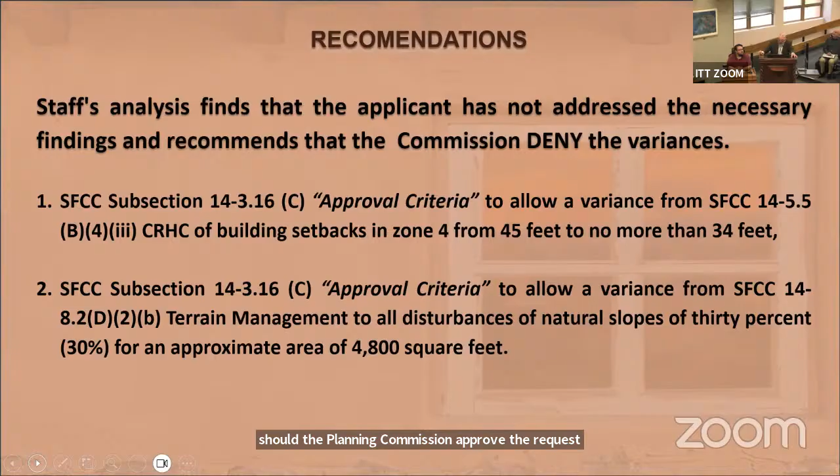Should the planning commission deny the variances, condition number 5 of the staff report directs the applicant to revise the application to comply with the code and resubmit the revision for staff's review. Should the planning commission approve the requested variance, the planning commission will need to address the variance approval criteria to support its decision. This would go for both variances that we have analyzed.

Staff's analysis finds that the applicant has addressed the necessary findings, recommending approval of the development plan subject to conditions identified in this report and within attachments A and B. Again, this is subject to a revised application, meeting the staff conditions without the variances.

There are 40 conditions listed in table 1, conditions of approval, page 3 through 6 of the staff report, and attachments A and B of the attachments. I believe that the applicant has been working diligently to reduce that number, which I believe he'll talk about. He's up here.

There are 56 technical corrections of approval listed on attachment A. Again, some of these technical corrections can only be done during the construction phase, such as fire protection and construction of the roads. Some are part of that construction portion, so they have to be on there. Some are just minor inconsistencies that have to be corrected on the sheets or within the report. Again, the applicant has been working diligently to resolve those issues, and he can talk about them when he's up here.

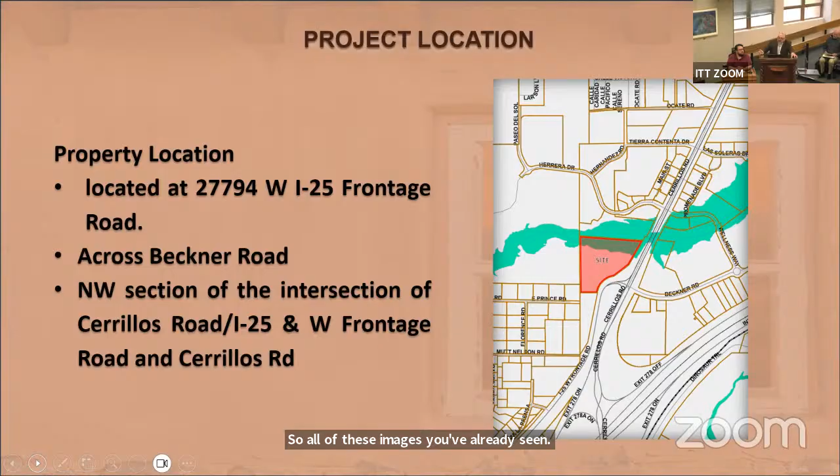The project location is plus or minus 19.21 acres. I'd like you to notice the I-25 frontage road design. The original design kind of swoops around the entrance there. This road configuration is changing with this proposed application.

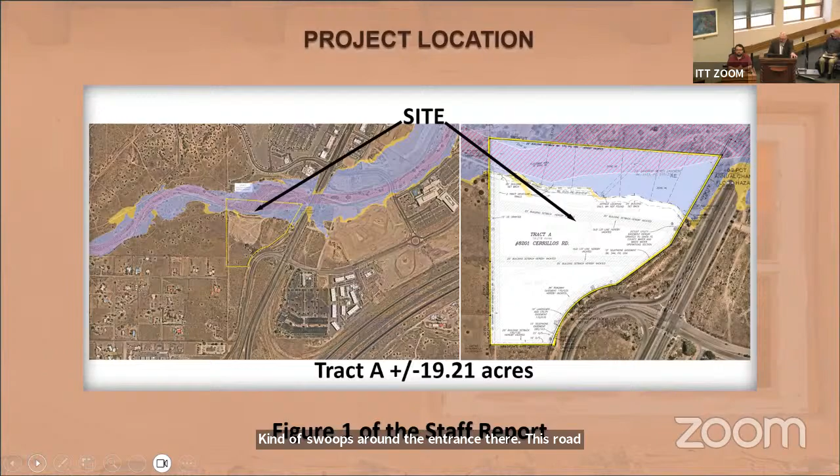The property is zoned C2. Adjacent uses consist of the school, which is the New Mexico School for the Deaf, to the west. Northwest is De La Luna subdivision, which is all residential. Southwest is the Arroyo de los Chamisos, to the north and state right of way to the east. The property just below it is zoned C2 and is vacant.

The applicant is requesting an 11-foot, not 6-foot as was in the report, reduction resulting in a 34-foot overall setback from the Cerrillos Road Highway corridor. The required setback in zone 4 from Cerrillos Road is 45 feet. Again, it's staff's position that if you've got a blank slate, you are the master of the design — you can design around these without the necessity for a variance.

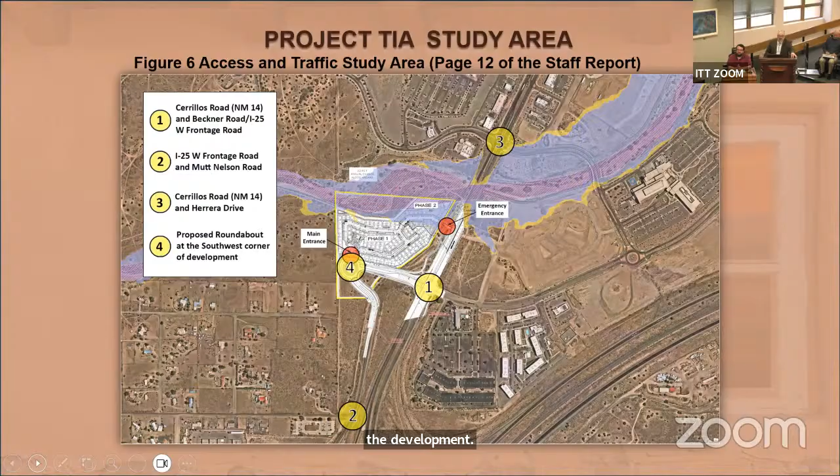I think I'll move on to the next one, and then we'll come back to that slide.

In summary, staff's analysis finds that the applicant has not addressed the necessary findings and recommends that the commission deny the variances, which are 2023-7662, the Bungalows Cerrillos Road setback variance, and 2023-7663, the Bungalows on Cerrillos slope variance. Staff's analysis finds that the applicant has addressed the necessary findings and recommendations for approval of the development plan, subject to the conditions of approval.

That means the architecture—if you understand what those conditions are—adaptability, compatibility, and all of those requirements that you're required to look at for approval of a development plan: the adaptability and the architecture go hand in hand.

Condition number 5 states that should the Planning Commission deny the variances identified in this report, the applicant shall revise and resubmit their development plan in accordance with SFCC 14-8.2(D)(2)(b) and 14-5.5(B)(4)(iii), for staff's review. This is to help facilitate the application through, since we know what we're looking for, and we're hoping that the Planning Commission will see that rather than bring it back, it would be a lot easier for us if we can just administer those reviews.

If the applicant doesn't agree with us, he can always appeal and bring it back himself.

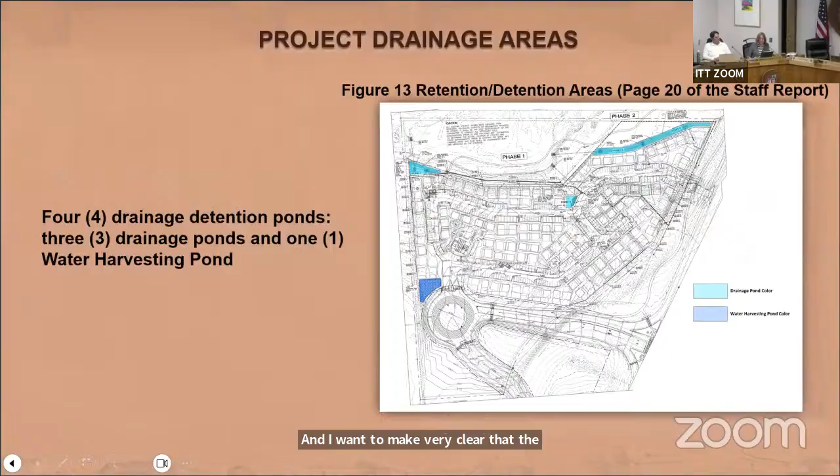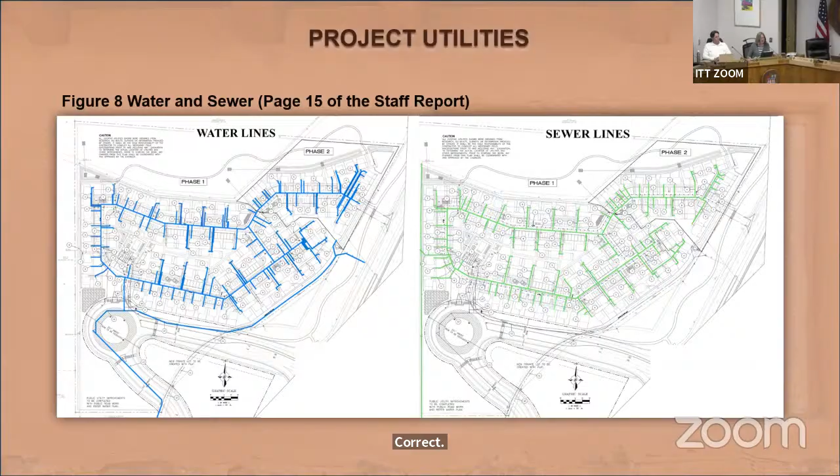I want to make very clear that the request here today is for a 34-foot setback, correct? My reading of it says no more than, which you can understand my potential confusion. Madam Chair, that is correct. The applicant is asking for a reduction to allow for a 34-foot setback. But we believe that because it is their design requesting this, you either build an application to meet the rules and regulations, as opposed to building a development that requires variances.

Thank you, Mr. Escabel. My other question is about the development plan approval. My understanding is that the commission today would potentially have the option, not saying what the commission might decide, to deny the variances and then deny the development plan with the analysis of criteria. In such a case, I assume the applicant would be able to bring a new development plan to this body. Is that correct?

Madam Chair, members of the commission, that is an option for the commission. With that comes a brand new application, brand new numbers, and fees associated with that, because it would be a brand new application, as opposed to either a preliminary approval brought back, or a final approval allowing staff to make sure those modifications and conditions are addressed. Thank you, Mr. Escabel, I appreciate that clarification.

Commissioner Smith, if you would like to ask any other questions you have at this point for Mr. Escabel, please go ahead. I'm sorry, I think this is pretty pedestrian, but going back to the slide, I was simply asking whether the lower right-hand side was a two-story or a one-story, because it looks like a two-story, but it was called a one-story.

Madam Chair, members of the commission, Commissioner Smith, if I erred in my labeling of my slide, that would probably be what you're looking at, but I'm looking at them right now. Let's see, one bedroom, single story. You're right, I did have that as a single story, and it does look like a dual story. So that would have been my error on the image.

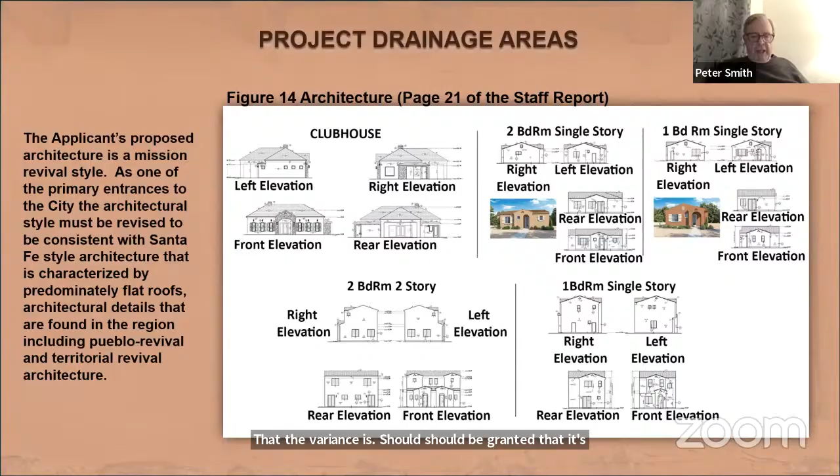Not a problem, I just was a little confused. Madam Chair, I guess my other question is, in general, is it the case that the commission itself has to come up with a solution if we think that the variances should be granted, that it's up to us to come up with our own solution and propose it back to the staff? Did I understand that correctly?

Commissioner Smith, I can let staff address that as well, and we can discuss it more later in the hearing if it looks like we're going to get to that point. My understanding, based on prior hearings, is that we would, with some assistance hopefully from staff, have to express how the variances do meet the criteria as outlined in the staff report and in Chapter 14, if we made the decision to approve the variances, one or both of them.

Are there any other clarifying questions for Mr. Escabel from the commission at this time? Commissioner Markey, go ahead. I don't know if these questions are for the developer or for staff, so I'll let staff determine that. But there's a water budget in the documents, and it's based on medical office, and I wasn't sure how that came about and what the plan is for actually creating a water budget for the project.

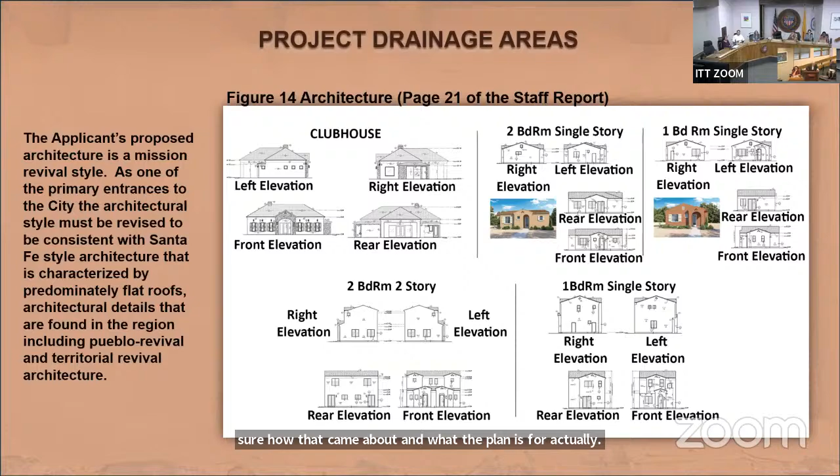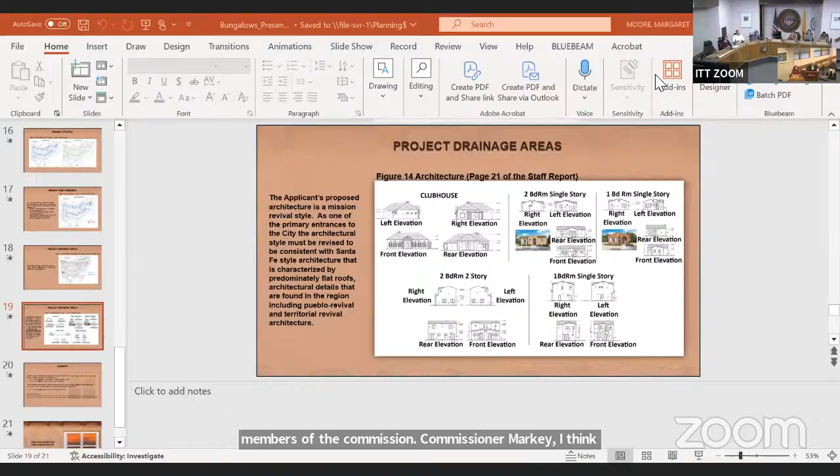Madam Chair, members of the commission, Commissioner Markey, I think I'm going to let the applicant and our staff from the water department discuss the water budget, since they are the ones that review it. It could be that there might have been a little error in that. Otherwise, I'll let them discuss it, it'd be better coming from them.

Okay, and I have a second question, which is the general plan in Chapter 5, on the character and urban development of the city, prohibits gated communities. And I noticed in the diagrams, we didn't see those on the screen tonight, but there's a series of diagrams in the packet, and there is a gate indicated in the packet. So I wasn't sure if there had been dialogue between the staff and the developer about that issue.

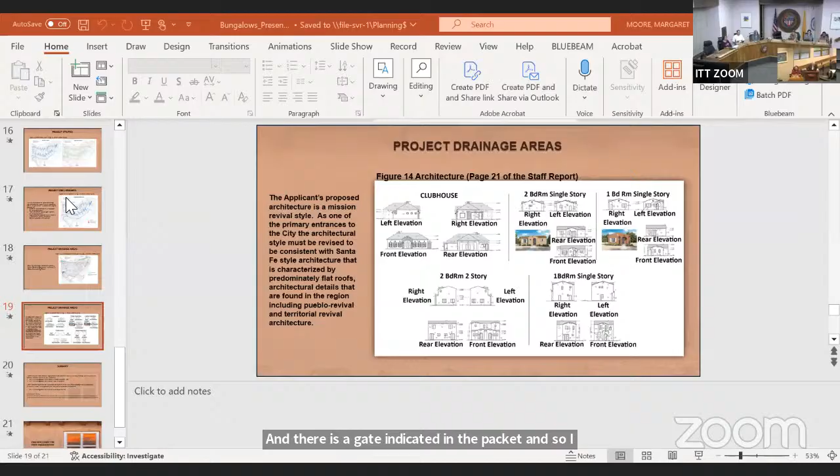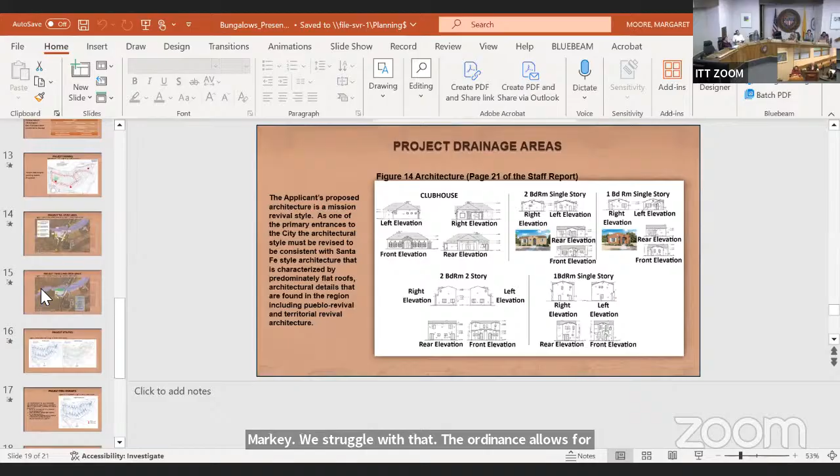Madam Chair, members of the commission, Commissioner Markey, we struggle with that. The ordinance allows for fences and gates. The general plan does not want gated communities, as you alluded to. Developers have the right to present an application in compliance with the ordinance, as the ordinance is what we're going to push, since the general plan is a resolution. I think if that were to be an issue, the commission certainly has the authority to push what they believe to be in compliance with both the general plan for this development and for this area.

A follow-up question on that. You say the general plan is the resolution. Are you saying it's not binding? The resolution is, the general plan is the will of the council. Basically, it's direction for us to follow as we develop our ordinances and move forward with the development of the city. Well, I believe it's legally, I mean, we're legally required to follow the general plan, and maybe I'd turn to counsel to confirm that. We will have to let legal questions go to our attorney, but the other thing is the general plan says should, uses the word should, which I think is always legally a complicated issue, rather than the word shall.

Yes, so I don't have the code section in front of me, but the purpose of the land development code is basically to effectuate the general plan. So that is our guidance, even though it's just a resolution, not binding law, it is required to be the principles that we use to guide decisions and interpretations of the code.

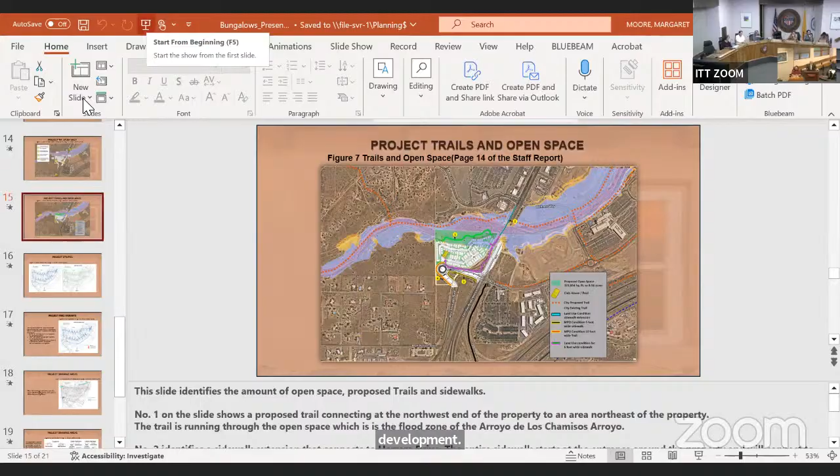None of the trails that are being proposed are for public use, but the trails that are within the development plan are designed specifically for the tenants and for the project itself. I think the developer will probably want to talk about those issues if you're going to want them open to the public.

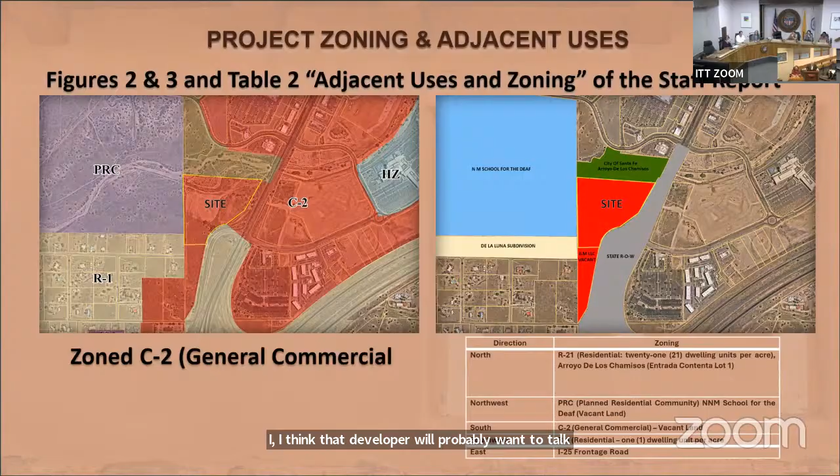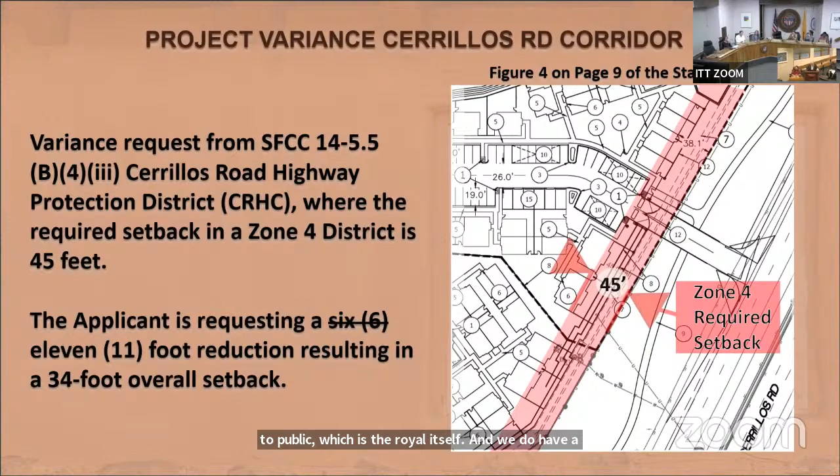Certainly, those areas within the city property are open to the public, which is the Arroyo itself. And we do have a trail running through the Arroyo, as you can see in the map, both on the report as well as on the slide.

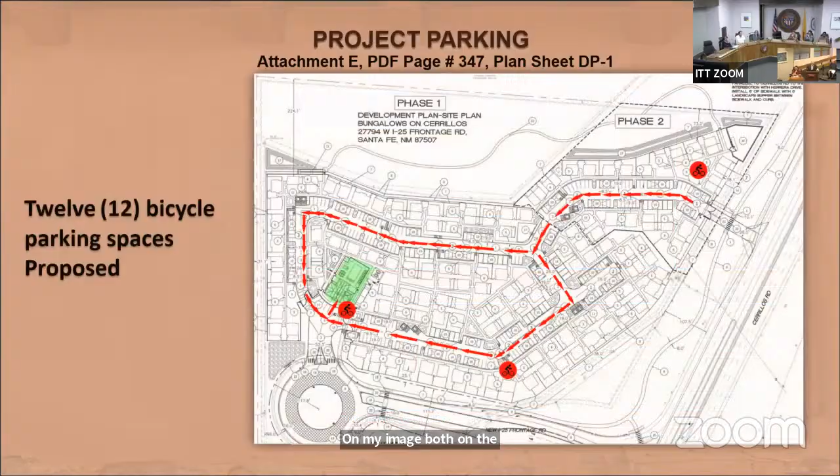So figure 7 showed the trails and the sidewalks, and I'm hoping we can get that up on the screen. So let me kind of move in that direction. I'll try not to talk so I don't get out of line, but I'll point to where the trails are. So first I'm going to point to the city trails where they are, and then everything else is private on the developer's property. Is there a way to enlarge that so that we can zoom in on it?

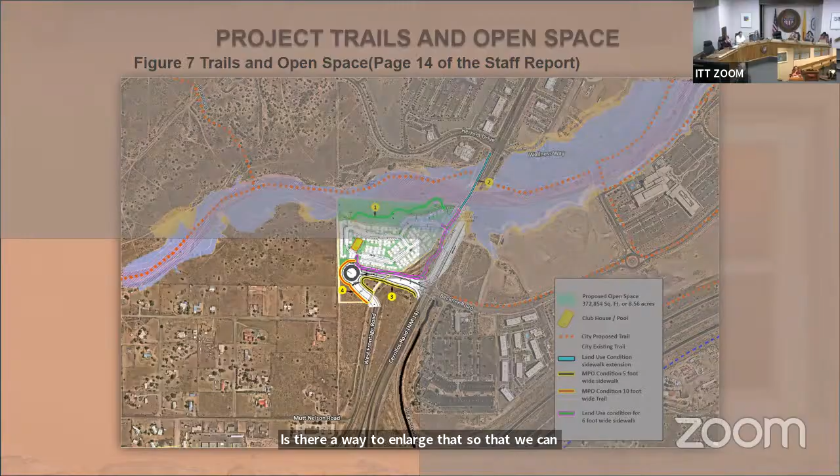I'm sorry commissioners, it's a little delayed. Is that a little bigger, Dan? I think it is. That looks bigger, yes.

For the record, while he is pointing, that is the city trail, correct, Mr. Escobel? Right, and I can annotate as well. Item 1 marked up here is a trail within the property primarily, but within the Arroyo open space, so it would be accessible to the public. The red line here is the Arroyo de los Chamisos Trail, on city property in the Arroyo.

Item 2 here is a publicly accessible sidewalk along Cerrillos Road that will extend beyond the property ownership across city right-of-way, NMDOT right-of-way, to join up with the pedestrian infrastructure at the Herrera intersection.

Item 3 again would be adjacent, publicly available and adjacent to the public right-of-way. Item 4 would also be accessible to the public as it's more of a multi-purpose trail, and those would all intersect together. Lastly, this one along here would also be accessible to the public. I think the interior pathways and sidewalks on the property would not — that's where we're at with the gate.

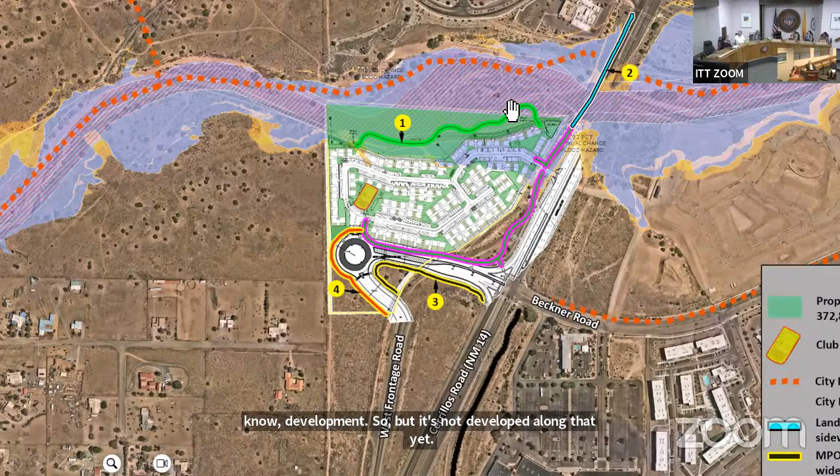One of our goals as a city is to have a sense of community and connection between communities, and I'm trying to understand how this community will feel connected to the surrounding properties. I'm a little concerned it doesn't feel connected. But maybe I need to direct these questions to the developer. I also have questions about the pool and the clubhouse and the use of those amenities. Thank you.

Are there any other clarifying questions for Mr. Escobel at this time? I have one — the proposed trails, the red dotted trails, I'm assuming those are not part of this development, just city proposed trails that are coming. Okay, just wanted to make sure. That is correct. Thank you.

Commissioner Reland: With your design and style of the homes they're trying to construct, you're saying they're not conducive to the area, but is it not true that we're seeing a lot of northern New Mexico style homes off Prince Road in the neighboring neighborhood, with pitched roofs in that neighborhood?

As I indicated, whether it's pitched or flat, we wanted to work with the applicant on that. One of the hardest things to deal with in a C2 district for commercial developments is we have an architectural points requirement in our code book, but that points analysis is geared toward much bigger buildings and larger facilities. What they're proposing is single-family dwelling unit apartments that mimic single-family subdivision type uses, so even with a perfect house, you're still not going to meet that number. For us to identify compatibility with the surrounding area as required by the findings for a development plan, we believe those houses should be in line with what's already there, more of a Santa Fe style architecture, as opposed to something you'd see in Albuquerque, Phoenix, or Nevada. We want to keep Santa Fe — even if it migrates a bit, at least you have something unique coming back into Santa Fe that mimics Santa Fe, as opposed to gradually changing into something we're not.

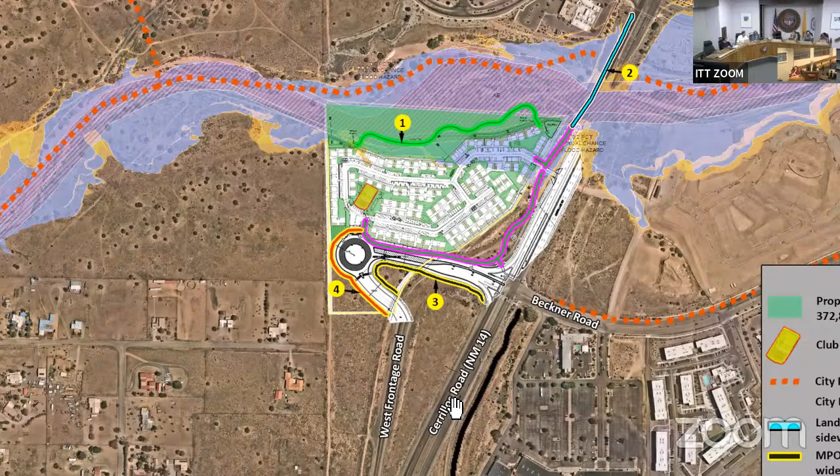Commissioner Miranda: Thank you, Madam Chair. Just to expand on that point, what you're basically saying is regardless of if it's pitched or not, what was submitted doesn't necessarily reflect Northern New Mexico architecture. And that's because of the fenestrations, the massing, kind of all the other architectural elements, right? That's just sort of a clarification point for everybody.

Madam Chair, members of the commission, Commissioner Miranda, you have several options. The first one is you can deny the variances, deny the application. That resets everything for the applicant. If he wants to come in, he's got to start brand new from scratch, pay the fees, everything. You can deny the variances and grant preliminary approval to the development plan, bring it back to the planning commission to ensure that what you want to see is what the applicant is going to present. Third, you can deny the variances, approve the development plan, and allow staff to manipulate the development plan so that we can get it prepared and move the application forward so that we can get more housing on the market quicker. But you can also postpone the application and ask the applicant to address many of these issues to come back to you at a later date. So those would be my thoughts on what your options are tonight.

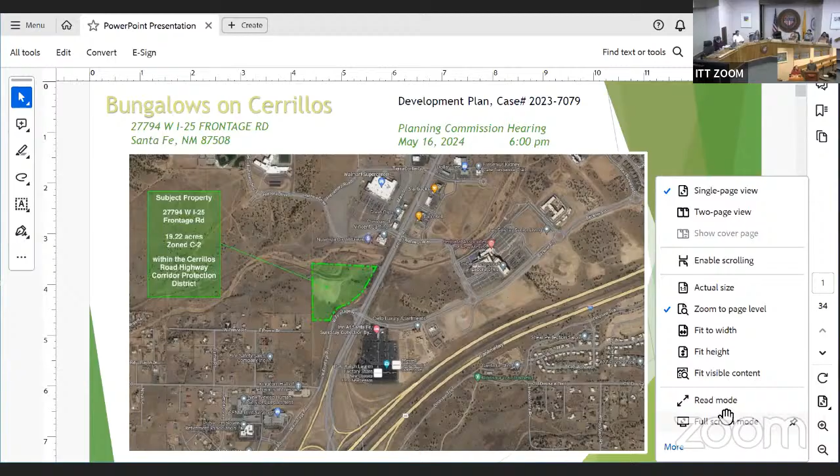Good evening, Madam Chair and members of the Planning Commission. I have a lot of questions to answer, and I intend to do that. I think this will help with some of the earlier questions and getting the full story on this project. So let's go ahead and get started.

As we look at this first slide, this is not only a title slide, but also a look at where this site is located. If you look at the bottom left of the green boundary for the property, there is one neighbor on that boundary, and I'll talk a little bit about them and what we're going to do for them. There is also quite a bit of open space along that arroyo, which we'll get into in more detail in a moment.

I should also introduce myself again. I'm Brian Ninninger with Orion West, and I'm representing the applicant tonight, Advanced Acquisitions, an affiliate of the Cavan Companies, which develops a beautiful market rate product here. I'm also representing them on the variances that have been approved by this body in the past, the very same variances, basically recommended by staff, approved by this commission and the city council. I'm going to get into the history of that and why that is.

This issue was not recognized. The only reason we're here, why we didn't design for this issue in the beginning, is that it wasn't recognized until late in the game. In the annexation agreement, which I'll also be talking about, these two variances were included, and the applicant thought they went with the land. However, there was a master plan associated with a motor company, Beaver Motors, that was going to build a body shop and have a car dealership. And that master plan expired.

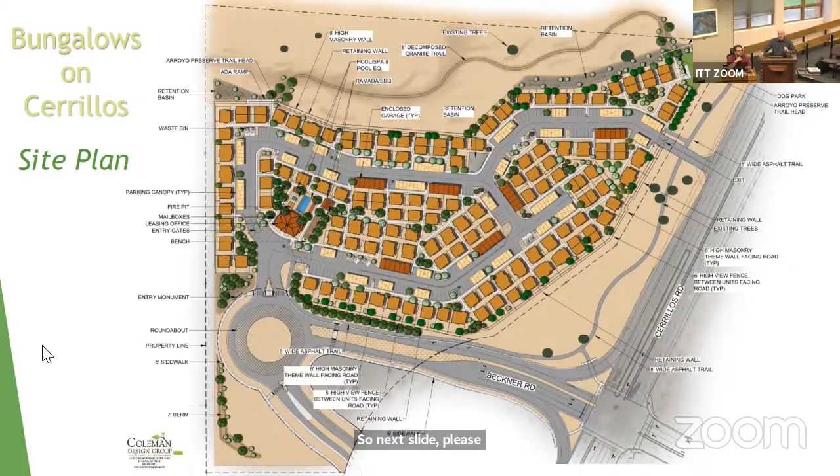Thank you for the expert red line. That was pretty good.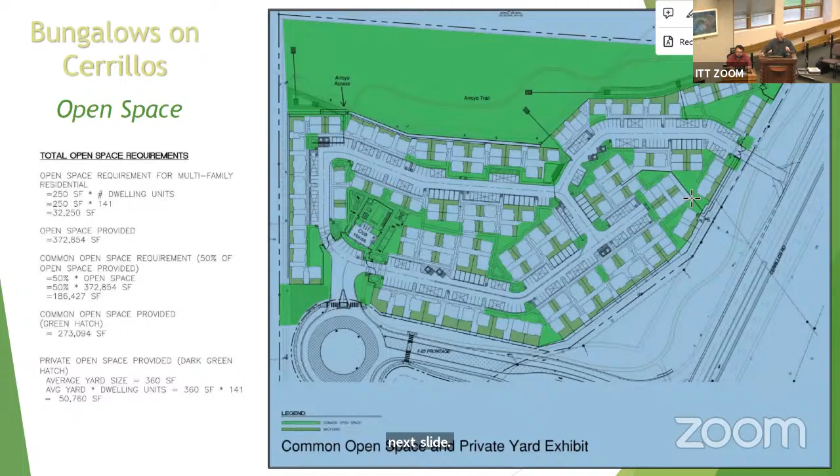Okay, I think it's important—my eyes aren't as good, so I better get mine up here so I can see. That's me getting old.

We're going to talk about site background history. This site was annexed in 2014, an agreement between the City of Santa Fe and Beaver Motors, LLC. At that time, their plan was to build a car dealership with an associated body shop and the ability to work on vehicles that came in. A slope variance was allowed then, approved by staff, the planning commission, and council in the annexation agreement, at 5,020 feet. We're asking for less than 4,800. It's the same place, the same slope, the same area, and we can show that on the map by going back to the annexation plan and master plan—it's the exact same space.

Most of this, as you'll see when we get into the variance, has been graded and disturbed over the years. The setback variance was reduced to 25 feet, and we're asking for 34 feet, so they received more and we're asking for less. The applicant at the time thought these variances came with the land, and depended on that incorrectly, but that's what they thought, and that's why we're here. The car dealership's master plan had expired, and the variances went with it, so we're back asking for some version of those same variances.

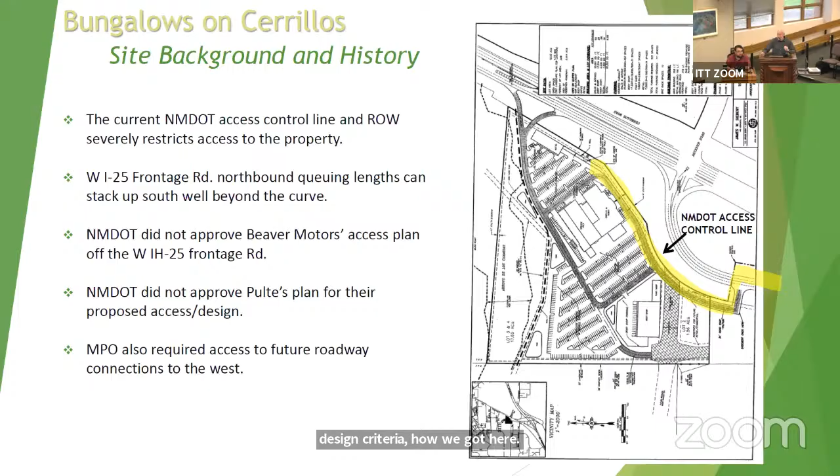We're also going to make improvements around the queuing—that was a real problem. You can see on this curve how parking was stacked and stacked and stacked, and neighbors aren't a fan of that. As we go through this, you can see the challenges. I'd like to turn this over for a couple of slides to our civil engineer, who really understands this, and then our traffic engineer will back up a few things on the design criteria, how we got here, and where we're going. Slide, please. Ron?

Madam Chair, again, my name is Ron Bohannon. I'm a registered professional engineer, second generation engineer in New Mexico. I was a third generation engineer. Been here for a while.

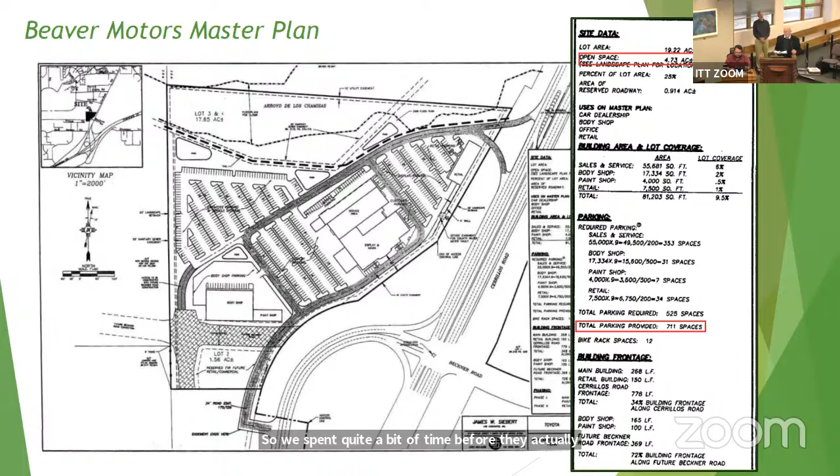Prior to the owners buying this, my firm did quite a bit of investigation because this had been here for 10 years. We talked to the DOT, the city engineers, and a lot of consultants to ask why did the Beaver project not work, and what were the constraints around this. So that's really what we wanted to do, come up with a solution that the DOT, the city of Santa Fe, and the MPO could all buy into, or else we'd be in the same situation as Beaver, where we could get a plan approved but not get access approved through the DOT. So we spent quite a bit of time before they actually purchased the property working through the solutions. If I can go to the next slide.

The biggest constraint is that Cerrillos Road, or Beckner Road, is supposed to be extended to the west. What you have now is a big sweeping curve that goes to the frontage road. But also to the west is a long range connection over to Herrera and to Paseo del Sol. That was really driving a lot of the long-term issues for that connection. I can go to the next slide as well.

So actually, if we could just go one more slide. What we came up with was a concept to prove out through a detailed traffic study. What we found in our analysis was the sweeping curve created a lot of sight issues, so it really needed to be realigned. Then the other biggest issue is the stacking distance from that frontage road turning northbound onto Cerrillos Road. Those were two huge challenges we needed to overcome.

Then the last one is, again, to have that flexibility to be able to go to the west. And when you start throwing in the alignments, nothing's at 90 degrees. So that's where we came up with the roundabout design through this area.

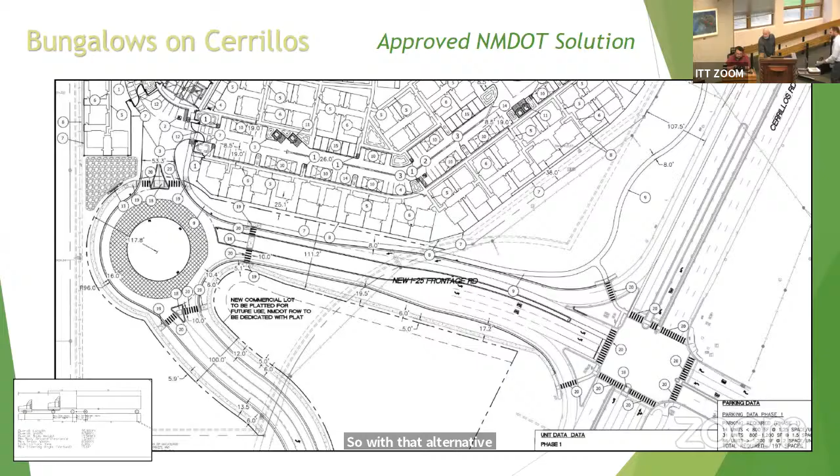Thank you. As Ron mentioned, I was on the team to look at traffic. Ron talked about a lot of specific things on the site that were needed, and I'll go through the reasons why those things came to be and why the existing conditions proved out that these were needed.

As was mentioned in the staff report, these four intersections were studied in conjunction with the NMDOT and the city of Santa Fe. These intersections were chosen due to the proximity of the project: Cerrillos Road at Beckner and I-25 West Frontage Road, Paseo del Sol and Herrera Drive to the north, the I-25 Frontage Road and Mutt Nelson Road, and Cerrillos Road and Herrera Drive.

As part of a traffic impact study, lots of things are looked at, and this little chart in the bottom left of the slide shows some significant numbers. These figures are from standards that are national.

The level of service is a level of serviceability of an intersection, from the best to the worst. Similar to grades in school, the level of service could be A through F - A, B, C, D, E, or F. Those correlate with how much delay a vehicle sees at an intersection. A is less than 10 seconds of delay, so typically most vehicles don't have to stop at those intersections. All the way down to F, which is the worst delay possible.

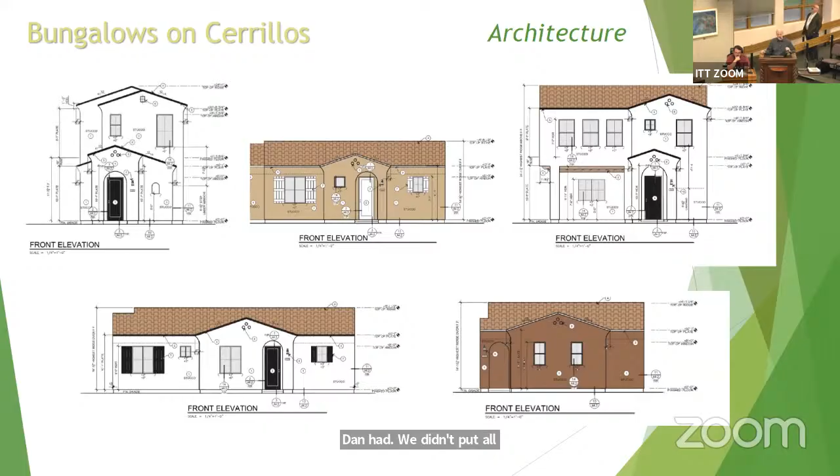So this is—I'm sorry, Aggie, getting ahead of myself. Next slide, we'll go fast. This is some of the slides that Dan had. We didn't put all four elevations, but this is the architecture we're going to work on. Next slide, I'm going to go quickly.

The next two sets of slides are about the variances, so we can go ahead and do the next slide. We're starting out with the slope variance.

So just again, background: we are requesting 4,765 square feet. I think 1,000 feet is allowed, but once you go beyond that, that's when you need to get a variance approved. The annexation agreement, as I mentioned before, did have a greater number at 5,020, and I just quoted the staff report for that particular variance.

I want to give the background, but with full disclosure, Dan will also comment on why the variance is being denied now compared to why it was approved then. So, quick history of the site.

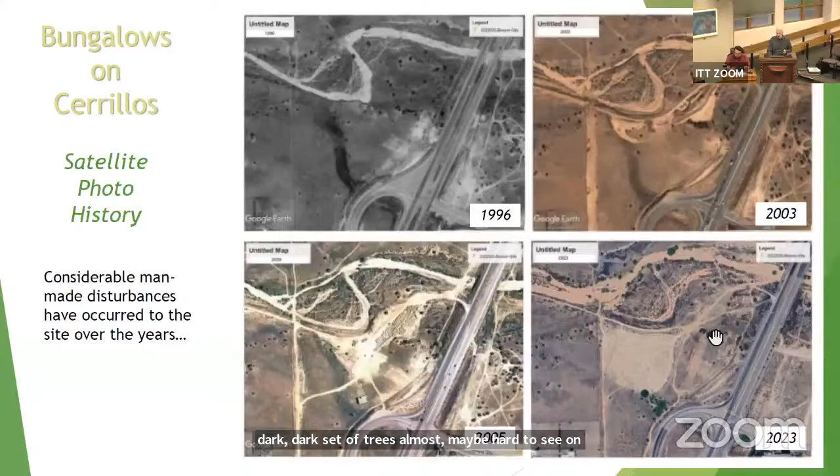Dan showed you this slide. Next slide, thank you. So I won't go into too much detail here. Next slide. This slide articulates where that is, where our slope is.

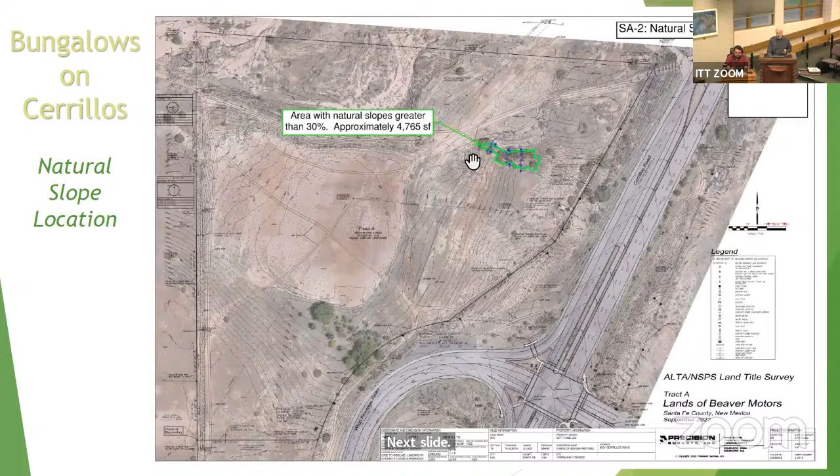Next slide. So I wanted to talk about our strategy. We spent a little time talking to Dee Beingessner on what, if we could do something that would make you happy and as amenable as possible to this variance, what would it be? So we put together at these trailheads additional trees. We're acknowledging there are 11 junipers in that 30% slope area, and we're replacing those junipers with 17 new bristlecone pine trees and Gambel oaks.

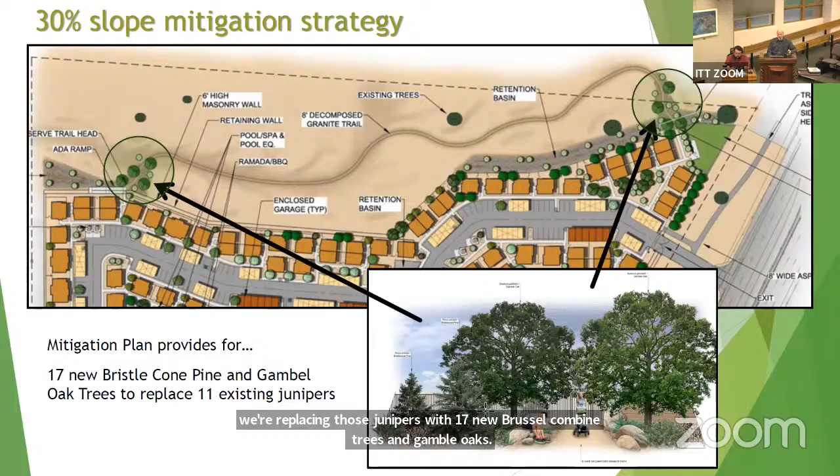Let's go to the next slide. This gives you a better full-blown view of how that might look. So we want to do something nice that has some character and its own slope. That would be a nice way to enter the trail.

Okay, so I think what I'd like to do is come back to this slide and the next slide at the very end of the presentation. And I'm going to let Carl Sommer articulate why we believe we've met the variance criteria here.

Maggie, let's go 2 slides. I'm trying to win some friends over here, keep everything going. So now we're just talking a little bit about the setback variance. Again, what was granted before was 25 feet for the setback. We're saying we'll agree with 34 feet. So we're not asking for as much, but we're still asking for a setback.

Now let's go to the next slide. This is the important one. So we looked at the right-of-way from our site all the way up to Airport Road, which is zone 4 for the Cerrillos Road overlay. What we observed is that from Airport Road to Herrera Drive, that right-of-way range was 45 to 60 feet, and that's what you see in green.

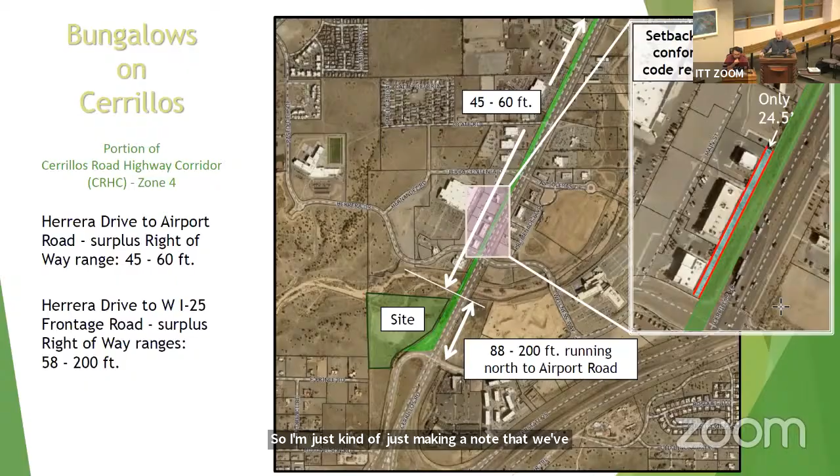Okay, let's go to the next slide. So again, showing the right-of-way in green, what we're asking for in blue, and what the code says in red, just to put it in perspective. This drawing is small, but 45 feet is the red line and 34 feet is the blue area. So you can see we're considerably there.

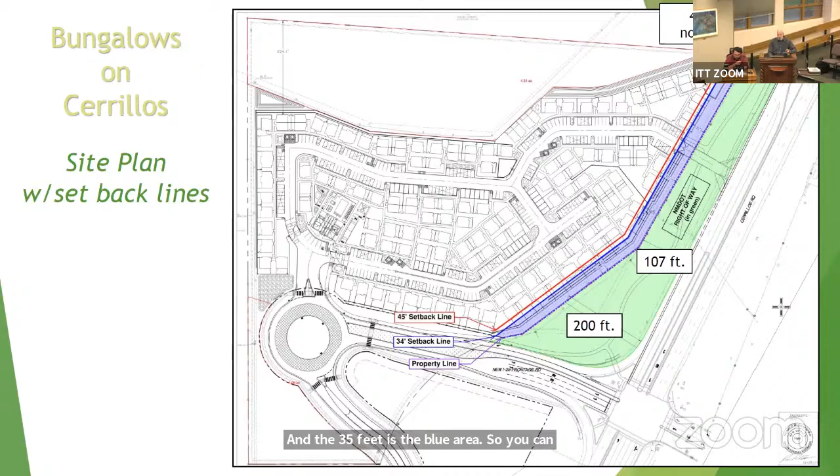Okay, again, I'm going to come back to this slide with Carl. So I want to close my part and then turn these two slides over to Carl to talk about the variance.

We just thought - I'm sorry, one more. Yeah, this is it. And then I'm going to make you go backwards for just a second for Carl. But so as I wrap up my piece, and then I'll of course stand for questions.

This is the before and after with regard to what was planned when annexation came along and what we're proposing. If you look at the land use, one was a car dealership and a body shop, the others are a residential community. For open space, they had 4.29 acres and we have 8.55. They had around 711 spaces of parking; we've got 300.

No roadway improvements were planned, and obviously the project didn't move forward. We have a significant redesign to solve some problems. The Herrera pedestrian connection wasn't there; we're providing that sidewalk all the way up along Cerrillos Road, finishing a significant piece. They did have variances that were offered or granted, and ours are really pending your approval tonight. So with that, I'm going to ask Carl to just do a quick review, if that's okay.

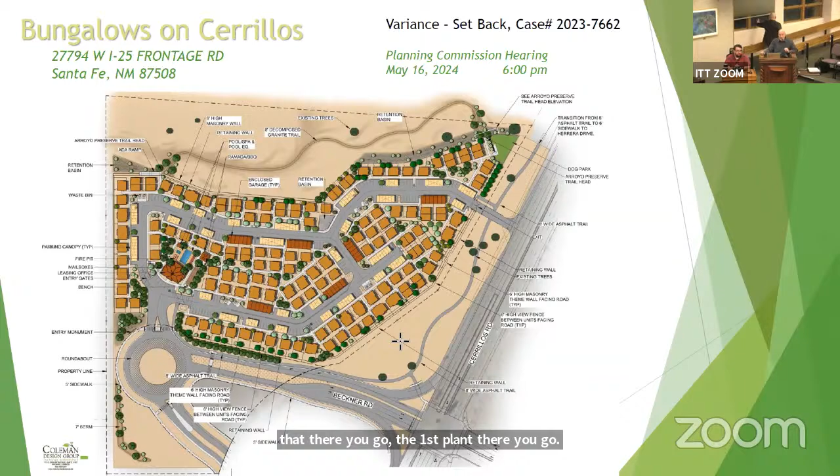Okay, I think we can. And Maggie, what I'm thinking, if you just scroll backwards to there you go. The first plan, there you go. Yeah, that's it, and it's, this one's not quite as big as the other, but it's close enough. I think we can read that. So the berm we're talking about is where Maggie just had her cursor, is that correct? We have two, and I'll talk about both of them.

So I do have a diagram up right now, it's an engineer's diagram, and it's a scale, and it's in a log format, so it's a little bit difficult, but what I do have is the numbers. So if you look at that berm and the location of that berm, and if we would call the top of that 0, so from the trail to the property line, roughly in the center is the peak of that berm, roughly. It's a little off, it might be a little further west, but it's close. So if we called that 0, and then we looked at the first, I'm going to blow this up because my old eyes are wrong. So if we look at that first, from the peak of that berm, calling that 0, to the floor plate of the first residence, do my math right here, we've got almost 15 feet.

So I think what I heard you say, Commissioner, that screening was good when it was an automotive dealership. Maybe it's not as good when it's residential, or I don't know, but that's the case. There's a considerable amount of screening, now it will taper off. So you have to also look going north. And if we kind of go from the corner of that intersection, sort of at a diagonal, that's a peak. And then as we go north, it does start to drop off.

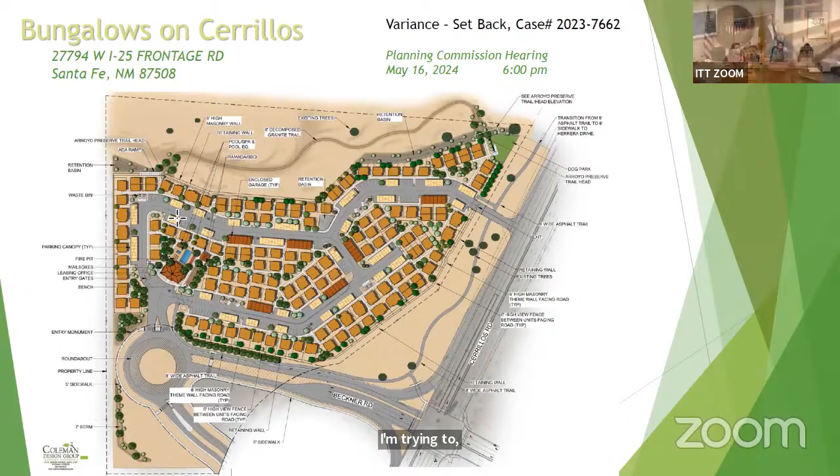I didn't see it captured. I'm trying to, I've got a whole bunch of that 30% slope. I know, my apologies, I don't think I have an accurate representation. I've got one of a notice poster, but it's not quite in the right area.

I mean, you might see where I'm going. Like for the variance request, it just seems like the screening to the road is not very gracious. And if you were asking for this, at the very least, document what it looks like, right? I had very little idea of what you're actually doing out there. It's a fair point.

But, and I guess the way I would answer that is we don't have the photographs today. I can tell you that 15 feet pretty much almost hides single story units. It won't hide the 2-story units. And again, it tapers off. So I understand your point.

This is about, you're putting what does look like single family residence, right? Pretty close to a major road in an area that doesn't have that, right? So the screening is actually the other way, right? And I just don't, particularly because honestly, if you didn't ask for the variance, you wouldn't be hearing this, but you're asking for it, and I get why, but I think if you're going to have that ask, you need to give more for it. And I don't see it.

So you would like some additional materials to understand that berming and that visibility. And to make sure I'm clear, Commissioner Morondo, you're thinking about it in terms of shielding the units from the road as much as shielding the development from the road. That's right. More the first than the latter. But really, just the landscaping, it just looks really sparse, from the way it's submitted right now.